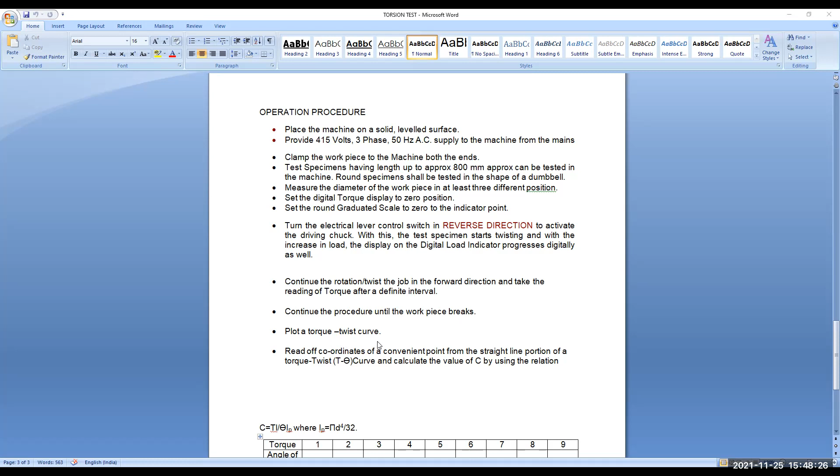After the workpiece breaks in the vise, we plot the torque and twist curve. The twist curve readings are given in degrees,

and torque readings are given by the device itself. Plot a torque and twist curve, read the coordinates of the convenient point from the straight line portion of the curve, and calculate the value of C using the relation.

So the torque-twist curve will increase to a certain extent, and after that it will become straight and more or less parallel to the twist axis, parallel to the torque line itself.

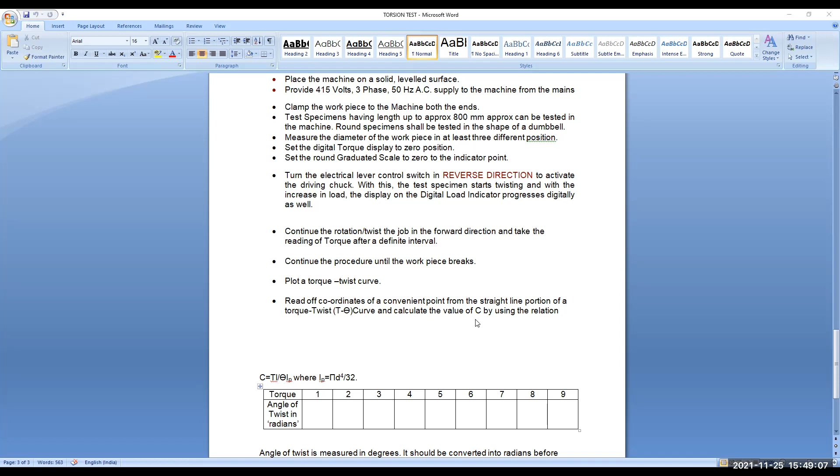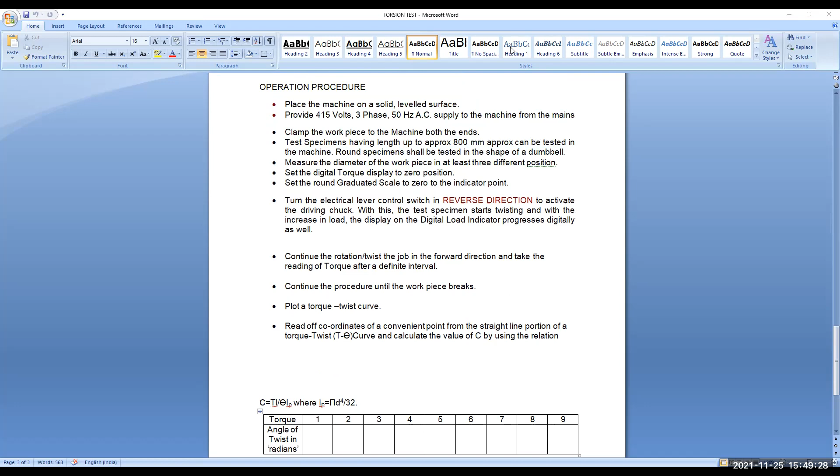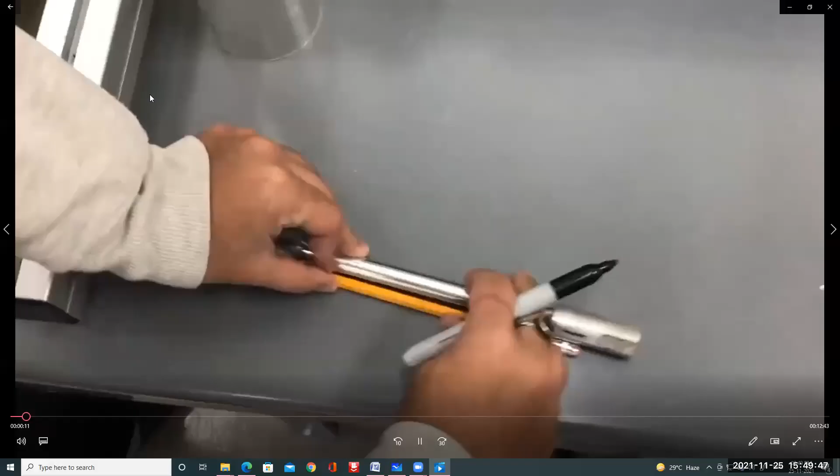All right, so here's Dave, and he's going to demonstrate the aluminum torsion test, or perhaps the pencil torsion test. He's using the pencil as a straight edge, drawing this handy black line with the Sharpie on the torsion specimen. You can see here again, it's the same specimen, a dog bone with the flats milled onto the ends.

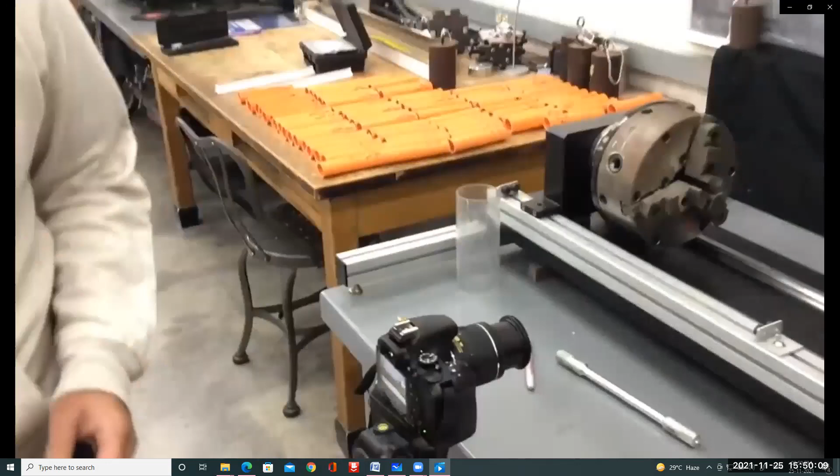Now it's time to actually load a specimen into the chuck. For those who have your green pass, you're familiar with the spring-loaded chuck key, right? The reason they're spring-loaded is that you can't accidentally leave the handle in the chuck, and then it starts spinning at a couple thousand RPMs, potentially killing people. This, as you'll see, does not spin at a couple thousand RPMs, closer to less than 1 RPM, but nonetheless we have the spring-loaded chuck just to be safe.

Now he's trying to get the flats on the specimen aligned with the jaws in the chuck with one hand, and with the other hand valiantly attempting to use the spring-loaded safety key. Now he's given up, and he's going to just use both hands to tighten that chuck, hopefully it wiggles and wobbles its way to be nicely aligned.

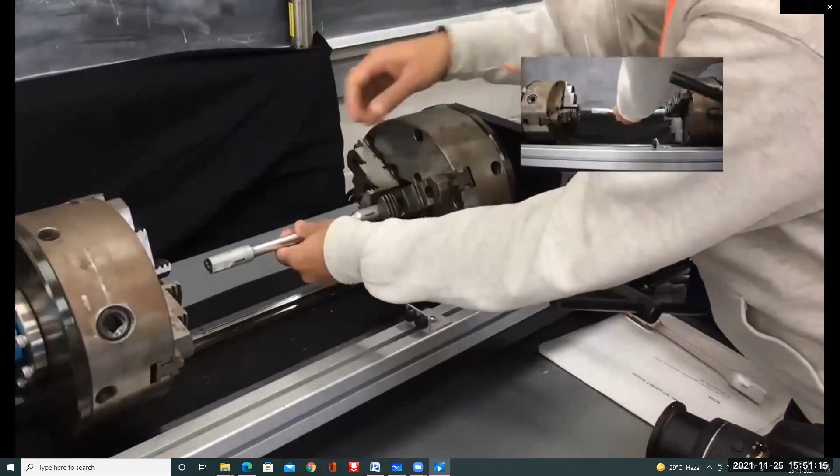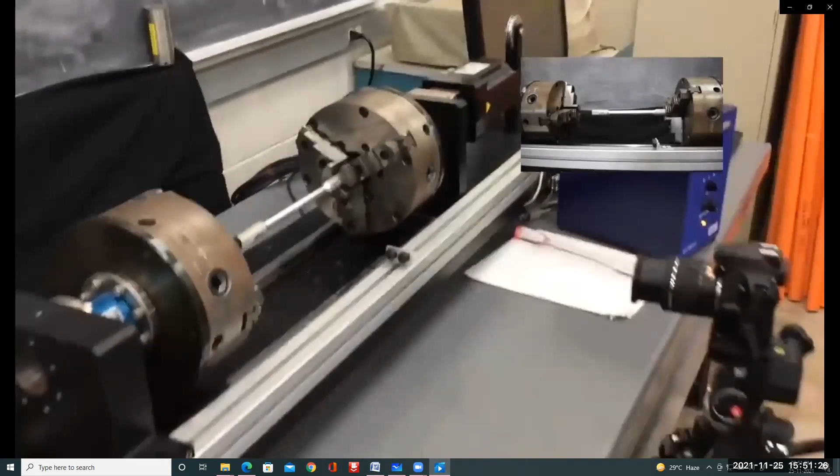And so he's got that in there. Looks pretty good, Dave. Yeah, now he can tighten it all the way down. You can see how the spring kind of pushed it out of there. So now remember that this is free to slide, and so he's got to open that side. We'll talk a little bit about why it needs to be free to slide.

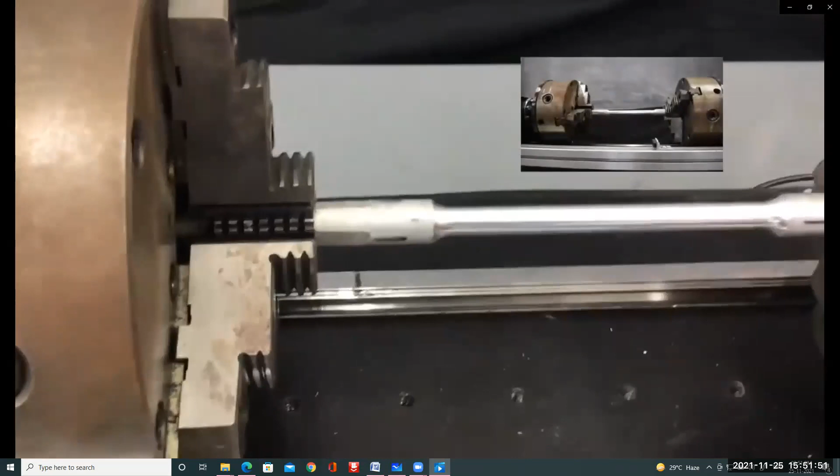You can see maybe by dumb luck he came pretty close to having the flats and the jaws aligned. Maybe not quite, so it looks like he'll have to jog the torsion side, the motor side, that one right there. So he'll turn the right side so that the flats on the left side align with the jaws on the left side.

Now keep in mind that this one does not twist. Well, it does twist a tiny bit, and that's what allows the torsion cell to read, but it's really imperceptible. Tiny fractions of a degree. I don't think it even rotates a hundredth of a degree. So effectively the left side is fixed there. The blue thing is the torsion cell, and so that jaw is fixed.

Now it's important that this thing is free to slide. We do have the capability to tighten it down, but we don't. So he's just going to slide it over. It lines up right with the flats. Very good. And so now he'll use the key again on this side to tighten it down.

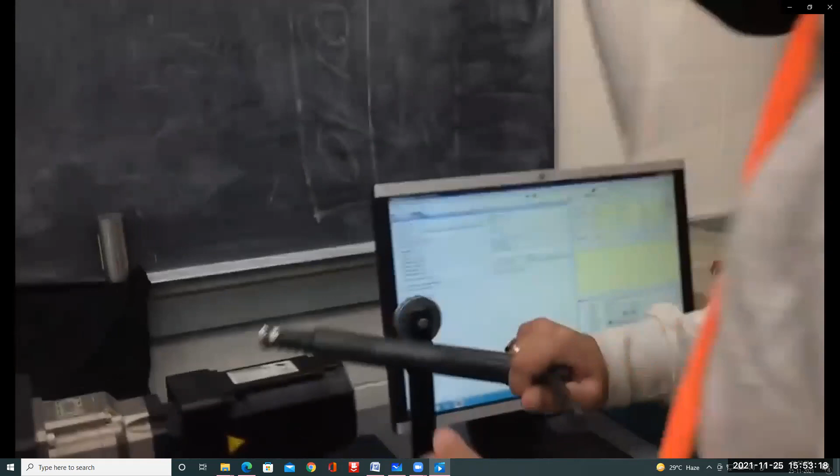The reason we let this thing slide is that we want to test this thing in torsion, and I know that you have all learned that torsion generates a shear stress, or torsion results in a shear stress. But as we twist this thing, imagine it's a bundle of fibers. Oftentimes we imagine even amorphous or isotropic materials to be a bundle of fibers. As we twist it, it gets shorter, and we want to allow it to shorten. Otherwise we'd impart a tensile load on it as we twist it. So it's important that that left end can slide.

Okay, so he goes over here and right clicks and zeros the two channels there. You don't have to right click it. There's actually a little button for zeroing, and then he clicks play and it begins.

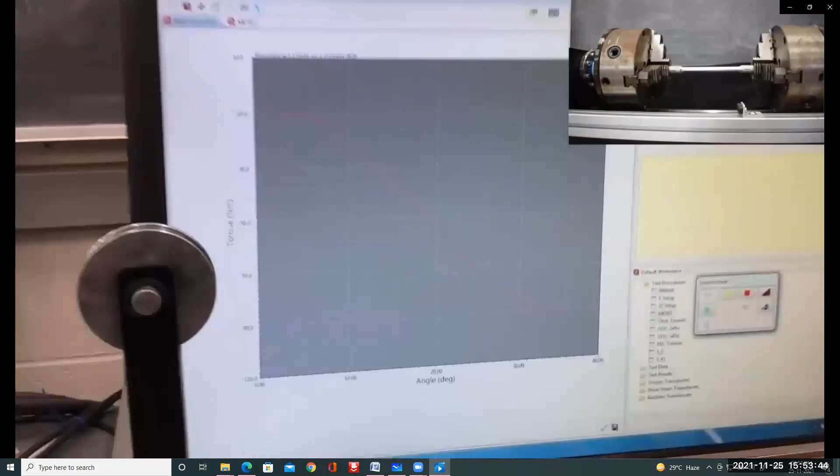And what's going on? This makes no sense. We've got angle and torque, right? Angle on the horizontal axis, torque on the vertical axis, but the torque is dropping. Yeah, so it turns out that with this one, as we're looking into the chuck, a counterclockwise torque is considered negative in this case, right? Not a big deal, we can handle that.

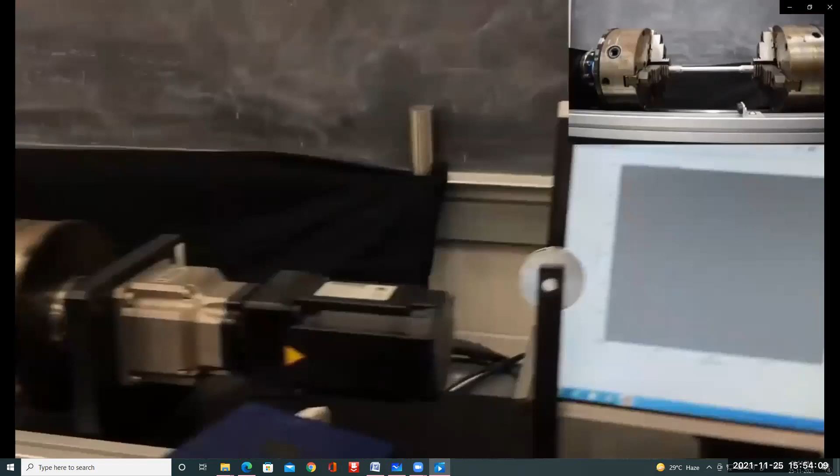And you can see this thing is rotating at almost one full revolution per minute, so it's pretty high strain rate as this thing twists. And if you look down there, I can barely read that. It looks like we've hit 200 degrees of twist already in just under a minute, so that about makes sense.

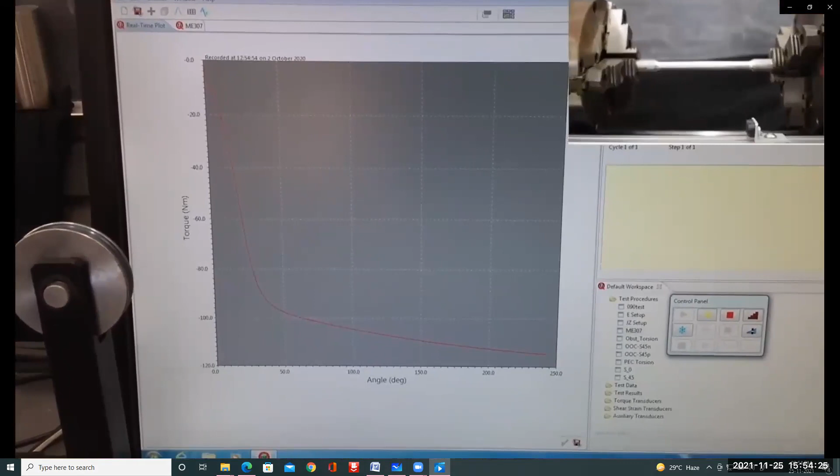And we can see that it's already starting to level off. There's very high resistance to the rotation at first, and then it drops off, right? As you've learned in 303 or 306, the torsional shear stress is not evenly distributed. It starts on the outside and works its way inward, which means it's highest on the outside, which means the first place it starts to yield is on the outside.

Okay, so now we've spun over one full rotation. You can see that black line that Dave drew on the specimen. We can see there's one full wrap of that black line now. So that black line really gives us, in my opinion, a much more visual clue, or a better way to see how fast this thing is rotating and how much it's rotated.

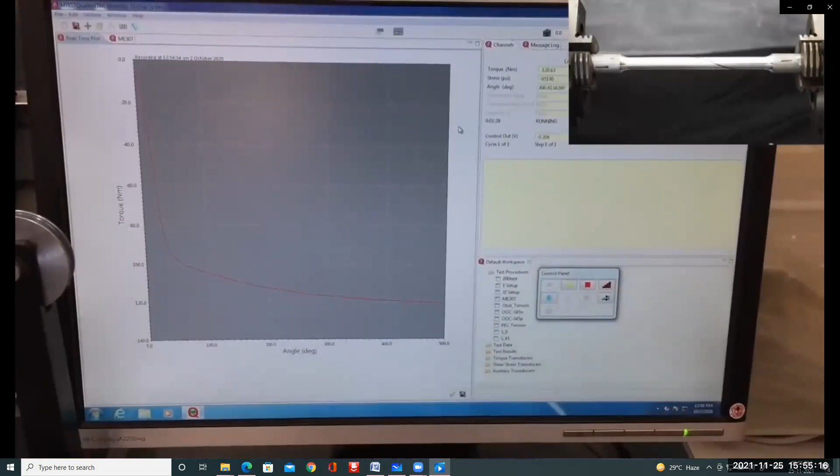So now we're up to about 600 to 800 degrees, about 2 revolutions, and we can see almost 2 instances of the line. We're making a candy cane barber pole kind of pattern out of the specimen, and we can see right now the angle of twist seems to be pretty evenly distributed as this thing rotates.

You'll learn a lot more about the relationship between shear stresses and normal stresses later this semester, but we wanted to show you how to use this equipment for those who want to use it for their project.

Now we're just starting to see that second black line show up on the right end there, approaching 800 degrees, and the torsion is very much leveled off. This indicates that all of the material is now yielding. Remember the torsional shear stress is highest at the surface and lowest at the center.

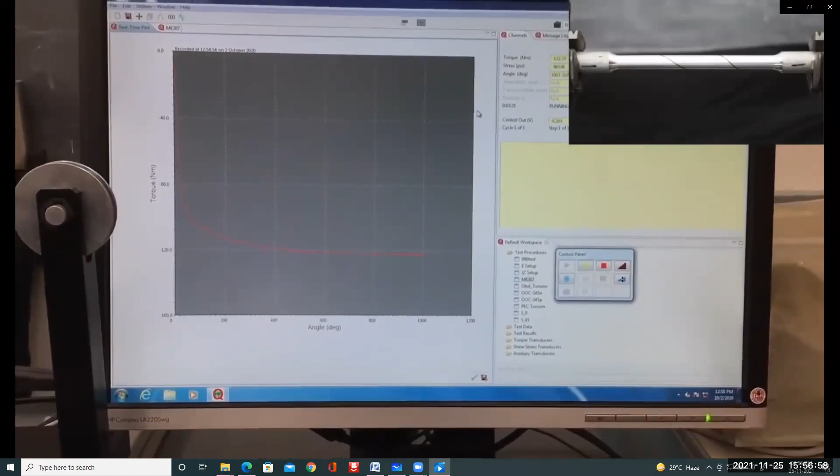Once the torque has totally leveled off, we can assume all the aluminum is yielding at this point. There's 2 ways to determine the yield stress. We won't be doing it because you don't quite have the information from 303 or 306, but the first place to identify yielding is when it becomes nonlinear, at about 30 or 50 degrees of twist there. The other way is by looking at the maximum sustained torque once it's all yielded.

Now we can see the angle of twist appears to be maybe not quite as evenly distributed anymore. It looks like the lines on the right end of the specimen, in the upper right corner, are kind of bunched up there. If this was a perfect world, the angle of twist would be evenly distributed, but now it's definitely bunching up on the right end, you can see the 2 right lines are very close together, so it's twisting more on the right end.

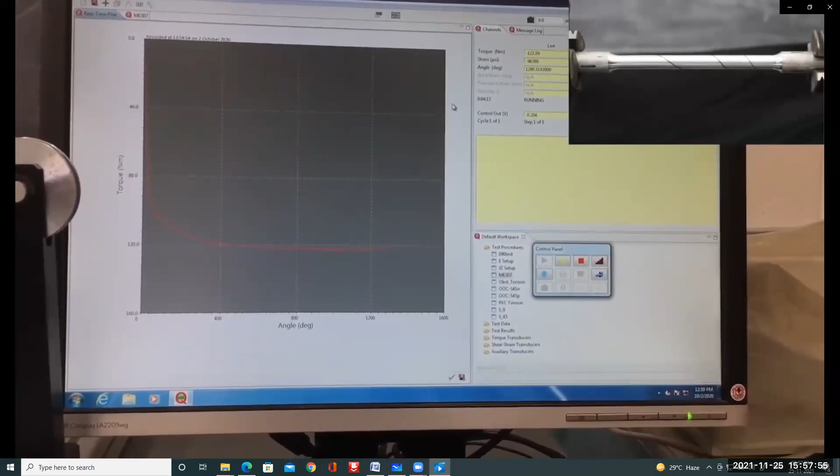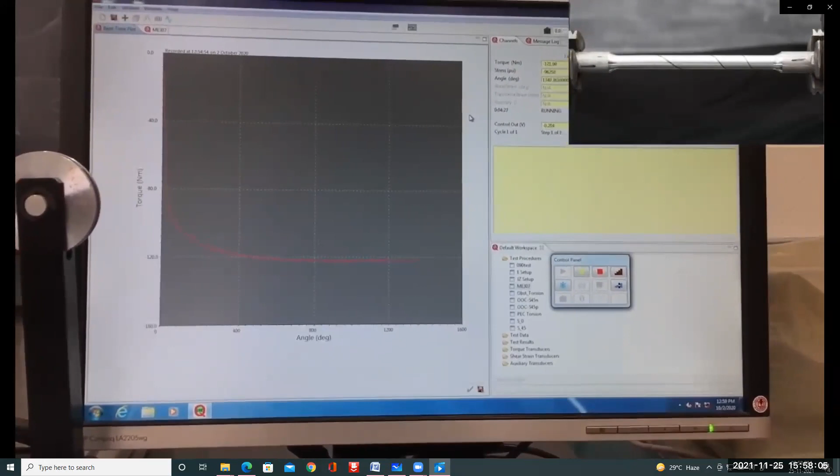Why is that? There might be some cracks forming. There might be some locations on the surface where we've achieved the ultimate shear stress, and it's beginning to fail. So if I were a betting man, which I'm not, I would bet that it's going to fail on the right end, just because that's where all the deformation is starting to happen.

Oh, what's going on here, Deb? Yeah, he's maybe observing that the right end seems to be twisting a lot more, and it's twisting more.

So they click stop. This doesn't stop automatically like the tensile and compression methods. This would just keep going until we stop it.

Now we've got to get that specimen out of there. We've got a little problem. Why is he jogging it? Yeah, because there's no place to put the key, so he's got to jog that torsion head all the way around. Yeah, you still can't see it.

Now he slides that thing away. It did shorten considerably, so now you can jog it. There's a high-speed jog and a low-speed jog on this thing. He's going to use the high-speed jog, jogging it around until he has access to that square keyhole.

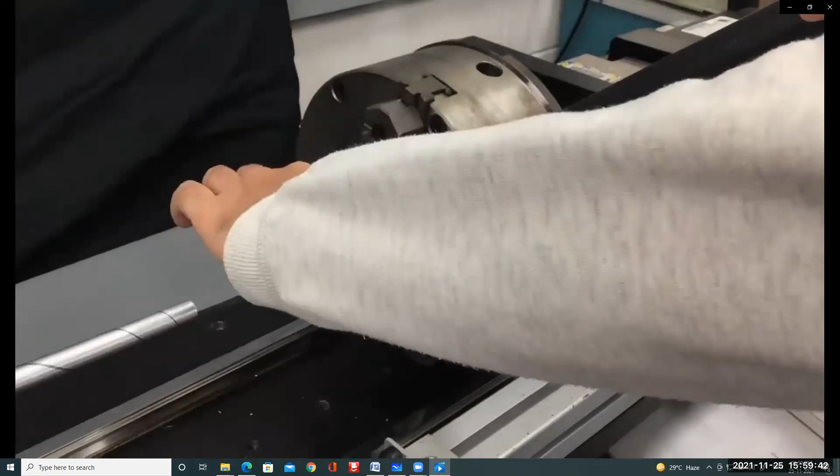And then he'll use the spring-loaded safety key to loosen that up, and he can get the specimen out of there. You can see the spring there. Very important to use a spring-loaded one in the machine shop, a little less important here. So there's the short end, the proverbial short end of the stick, and you can loosen up that end.

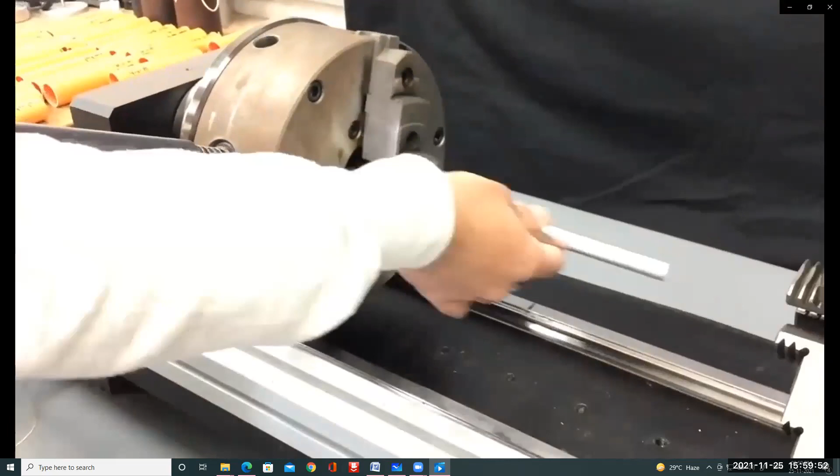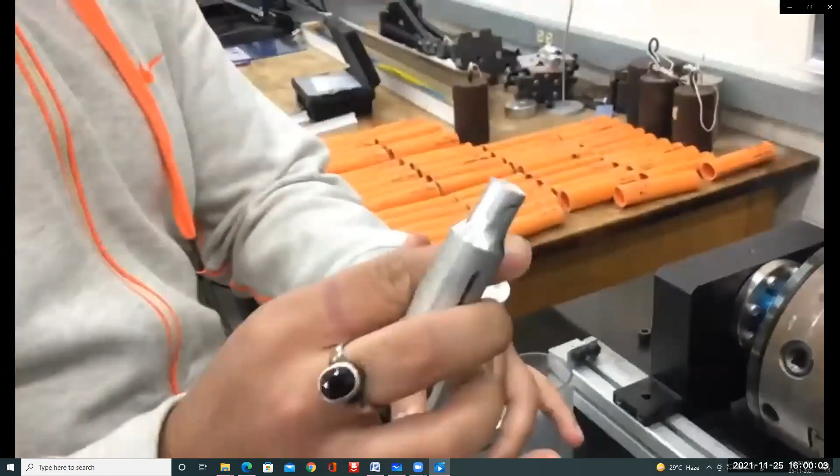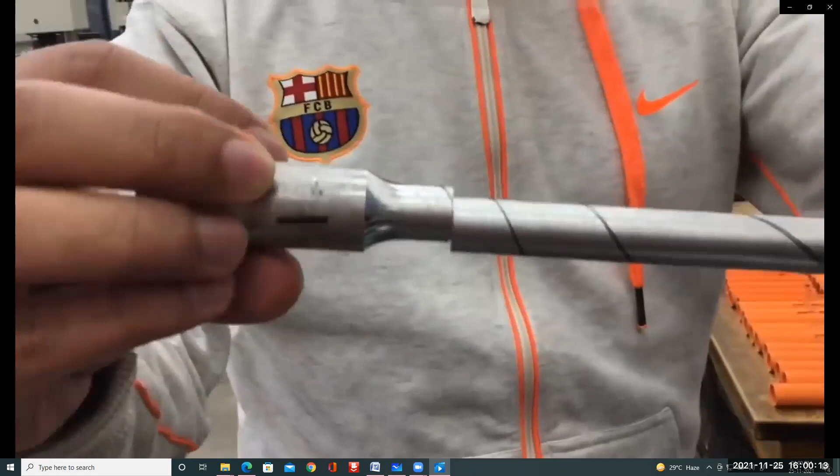This is very interesting. If you recall the tension experiment, the fracture surface was 45 degrees. In this one, the fracture surface is totally normal to the axis of the specimen, so it's perpendicular, normal. And it fractured on that surface for some reason.

Again, you'll learn more about that later on this semester in 303 or 306, and you'll learn much more about that when you take, for those of you mechanical engineers or BSEs, machine component design.

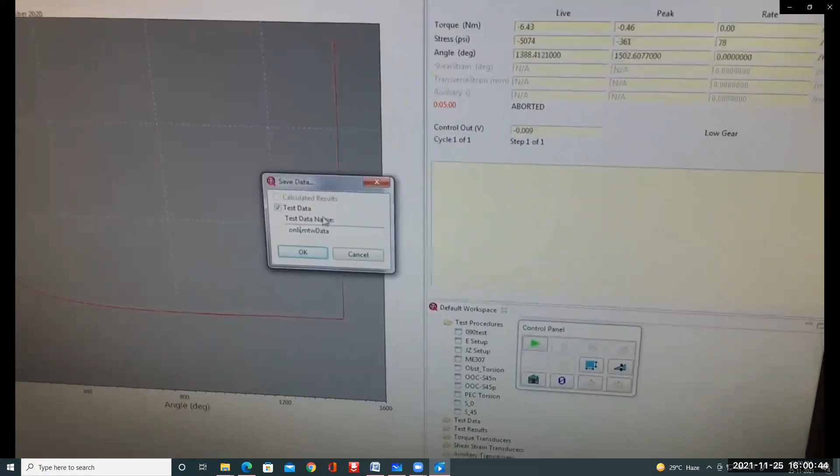All right, now we've got to save our data. A little quirky here, we're going to save the test data with the save icon. It's got this long file extension, MTW data, the world's longest file extension. Dave is just going to eliminate that.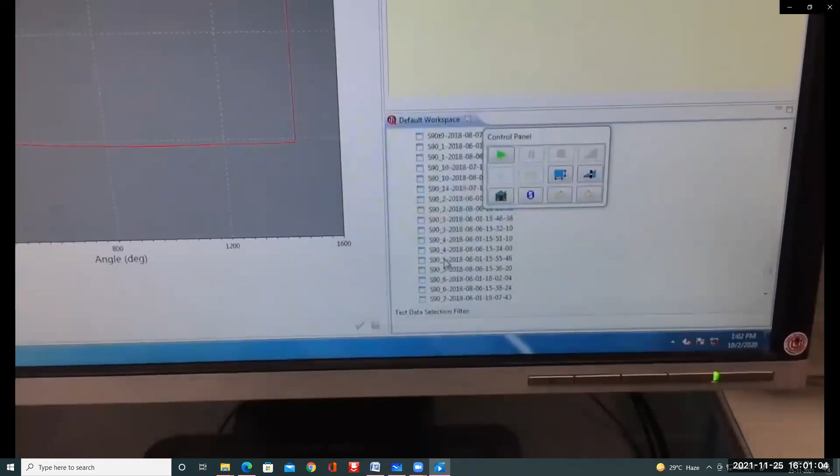He gives it an informative name, online torsion data aluminum, clicks OK. It has now saved the data in a proprietary Admet format. He goes down and saves it in the 307 folder. There it is. Now he needs to export it.

We're not too interested in proprietary file formats, so we're going to export it as a comma-separated values. He's going to put that somewhere intelligent, looks like on the desktop in the 307 folder.

It's always fun for me to look at this folder because it's kind of a little tour of TAs past. There's some legendary TAs on this list here.

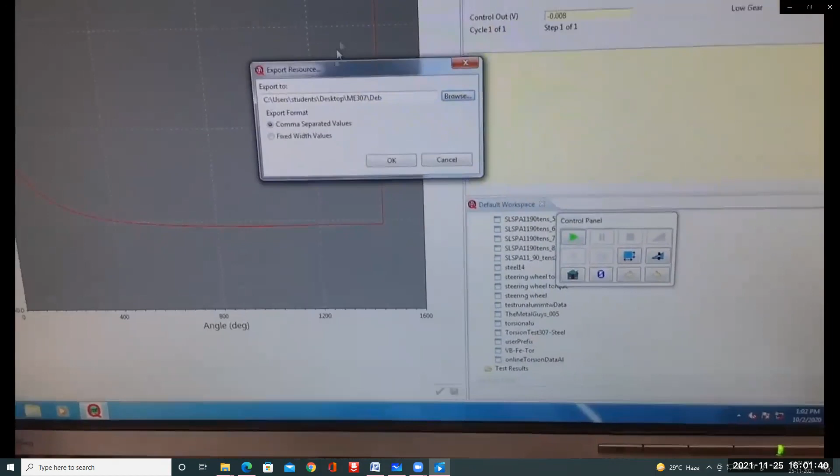But Dave is now first making his mark, so he makes his own folder. He's going to export the comma-separated values file into there, so now we have it in something we can read with MATLAB, EES, Excel, Google Sheets, whatever.

It takes a little while to do. Not quite enough time to play the girl from Ipanema here.

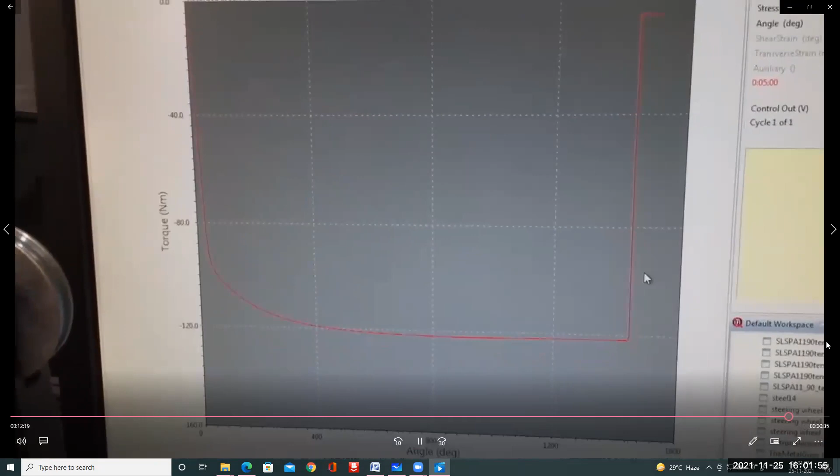But okay, so it's done. I'm saving. Dave, being the cautious and conservative engineer that he is, he's going to open up the desktop and just make sure that data file looks the way it should.

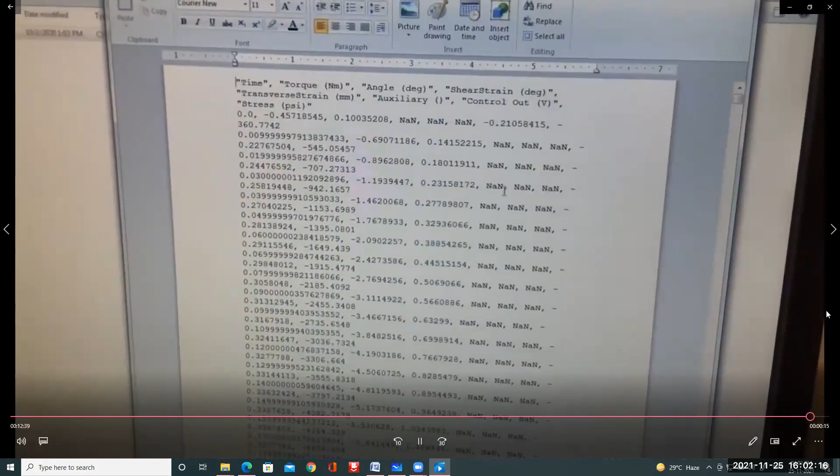Double click on that. Okay, so now you can see that there's a time, a torque, and an angle channel that all show up, and then a bunch of other stuff that says NAN, N-A-N. That's kind of mathematical speak, or computational numerics speak, for not a number. Thank you, Dave.

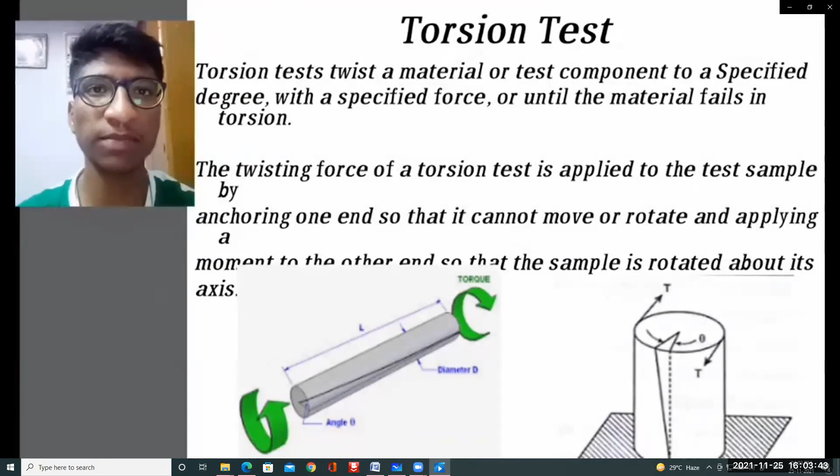So torsion test comes under destructive test. It is nothing but the specimen achieves breaking or failure point. It means testers test the material or specimen until the failure or breaking point, it is called destructive test. We have so many destructive tests, for example tensile test, compression test, impact test, torsion test. These all are examples that come under destructive test.

So friends, I would like to explain torsion test. Torsion test twists a material or test component to a specified degree with a specified force, or until the material fails in torsion. It means, guys, in the torsion test here we see the diagram. A material can be twisted both sides, but in the torsion test we have only one movement to twist the material. So I will explain the process and procedure of the torsion test later.

So our aim is, from the torsion test, to find the rigidity modulus by using the torsion test machine. Rigidity modulus is a mechanical property. It is nothing but the ratio of shear stress and shear strain.

When we do twisting movement, stresses are developed. Or when we do twisting movement, the cross section will change, that is nothing but shear strain, and stresses are developed, that is nothing but shear stress. So rigidity modulus is equal to the ratio of shear stress by shear strain.

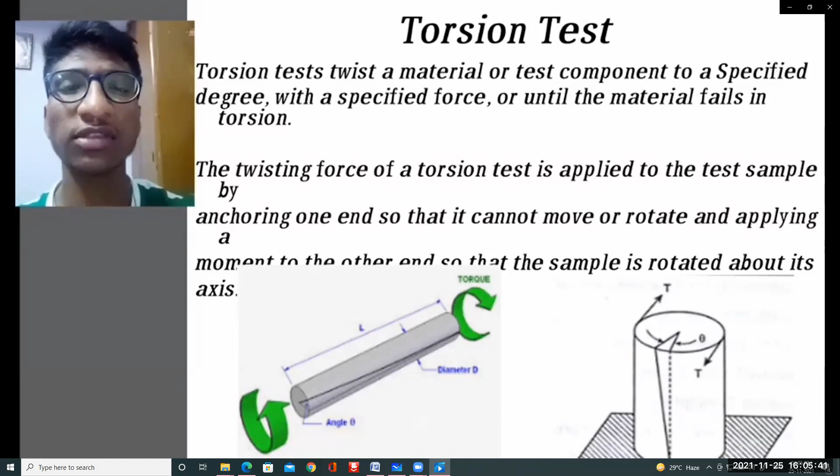So we have to take apparatus: torsion test machine, vernier calipers, and one specimen. Initially, we have to take dimensions of the specimen for calculating rigidity modulus. So we have one equation.

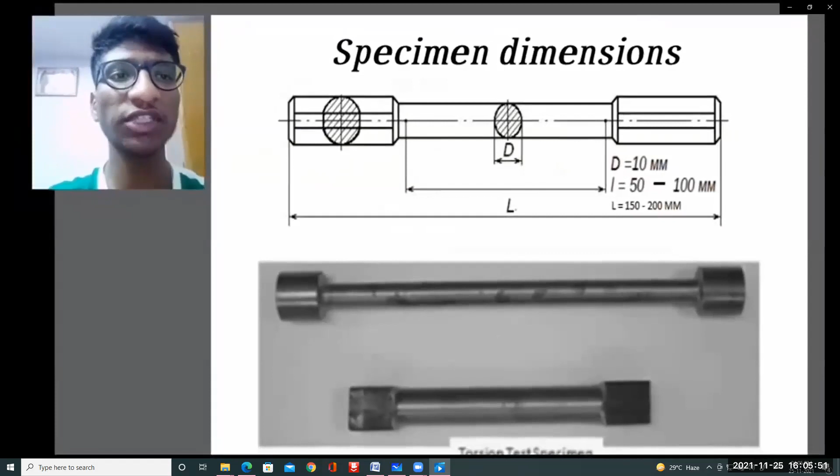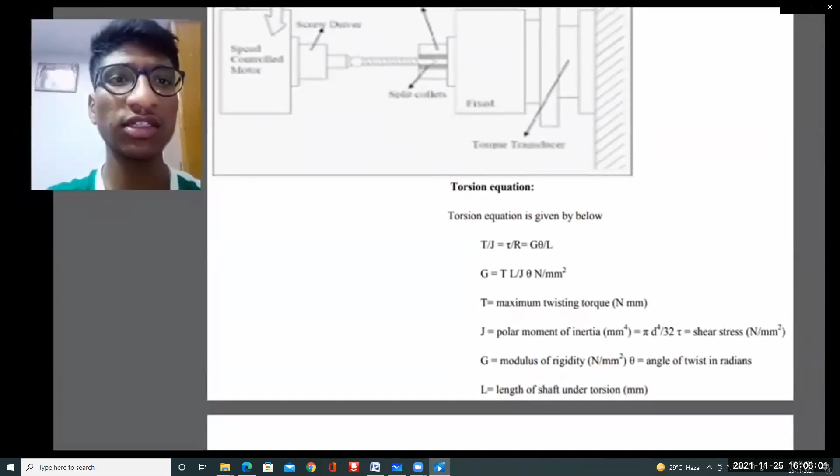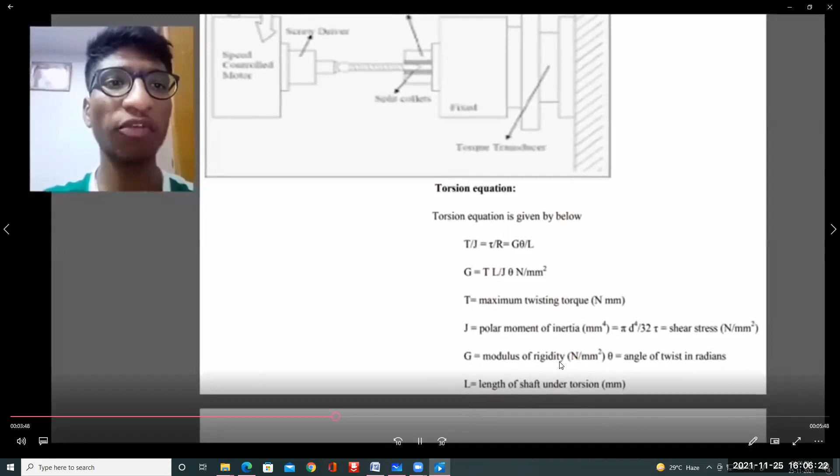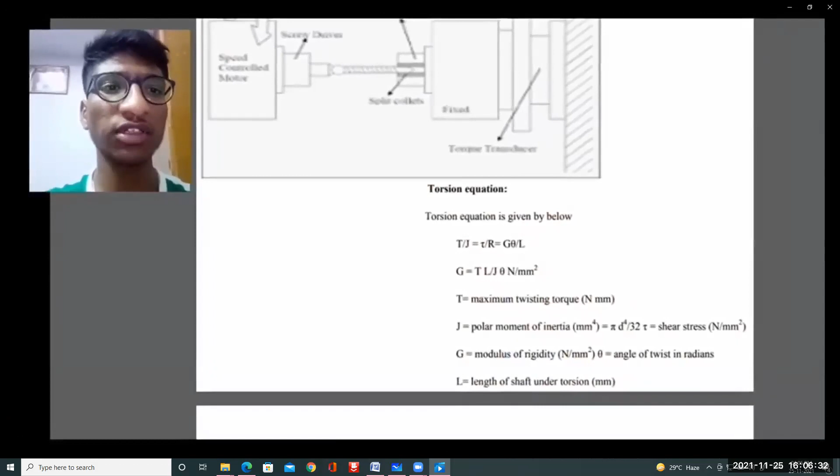T by J is equal to tau by R is equal to G theta by L. So G is equal to T L by J theta. T stands for maximum twisting torque, how much we are applying force, measured by using a torque meter. J stands for polar moment of inertia, equal to pi d power 4 by 32. G stands for modulus of rigidity, it is a finding factor. L stands for length of the shaft, nothing but gauge length. From this diagram, friends, I will show you how to take the gauge length.

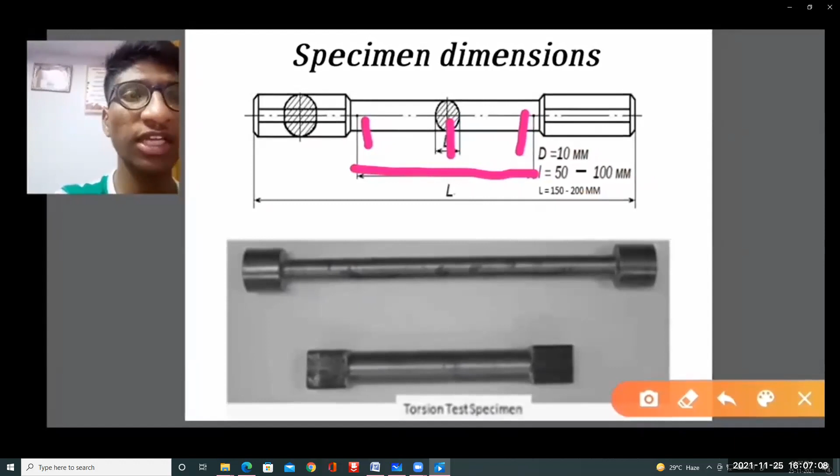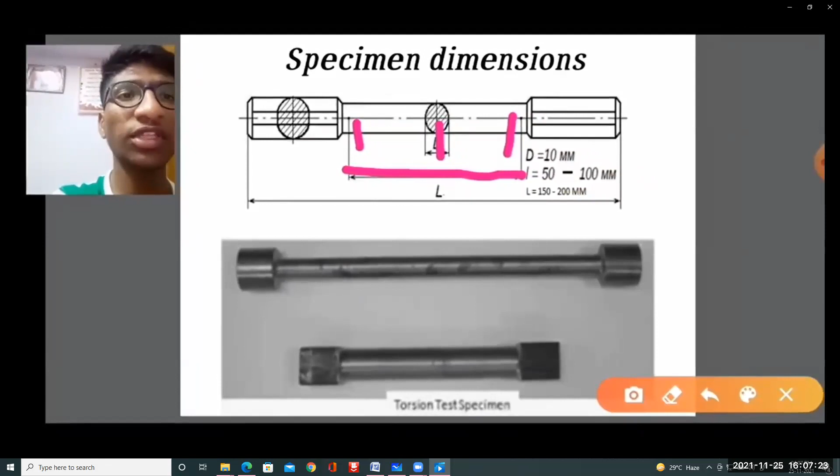This is the gauge length. We have to take this length for gauge length, and at these three sections we have to measure the diameter with the help of vernier calipers. Using this diameter, we calculate the polar moment of inertia, which equals pi d power 4 by 32. We average these three sections to get one diameter, and with that diameter we calculate the polar moment of inertia.

How to do the torsion test: fix the gauge length on the shaft with punch marks. Measure the diameter of the shaft at three sections within the gauge length using vernier calipers, and take the average value for calculating the polar moment of inertia.

From the expression T by J equals tau by R, where tau is shear stress and R is the radius of the shaft cross section, find the permissible torque that can be applied on the shaft for the assumed permissible shear stress. Now select the suitable range for the torsion test machine.

Fix the specimen. Apply the torque slowly by rotating the handle on the right side of the machine. Note the torque from the torque meter and the corresponding angle of twist from the angle measuring disc. Repeat the experiment two or three times and take six readings, then average all of these.

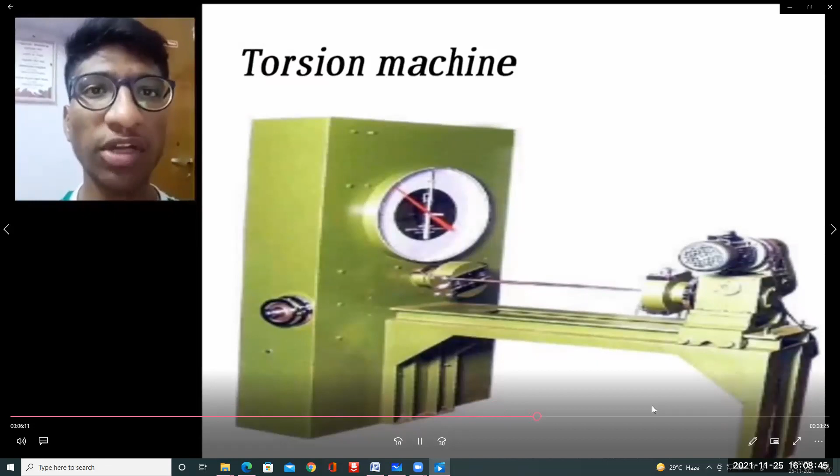We have to calculate the rigidity modulus. So how do we find the rigidity modulus, friends? Going back to the equation: T by J equals tau by R equals G theta by L.

G is the factor we are finding. T means torque, the maximum twisting force. We have two machines in the laboratory - one with 0.01 division and another with 0.05 division. Choose whichever is more comfortable and easier for calculation. We take a reading at each 3 degree interval.

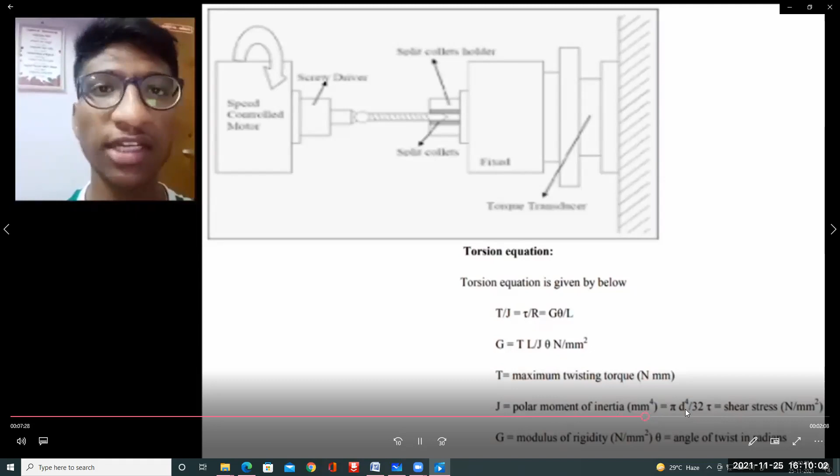T is the torque and J is the polar moment of inertia. About three sections we take the average diameter, and with that diameter we calculate the polar moment of inertia, that is pi d power 4 by 32. R is the radius, G is the factor we are finding, theta is the angle of twist, and L is the gauge length.

I will show you the tabular column for how to take readings. Initially we have twisting moment, angle of twist, and the finding factor, that is modulus of rigidity. Initially I take 34.5 kg, which we convert into Newton meters using 9.8, giving us Newton meters. Next is the angle of twist.

At each 3 degree angle we calculate how much load is being applied. That 3 degree angle converted into radians is 0.052. From these two values and the polar moment of inertia of 430.8, the diameter of the shaft is 8.14 and the gauge length is 15.2.

We put all these values into the formula, T by J equals G theta by L equals tau by R, and finally we get the modulus of rigidity. So friends, I hope that through this video you understood everything very well.

This is the torsion machine. This is the torque meter. Here we have the angle of twist indicator. Between this point and this point we keep the specimen. So finally my conclusion is that torsion is nothing but the twisting moment.